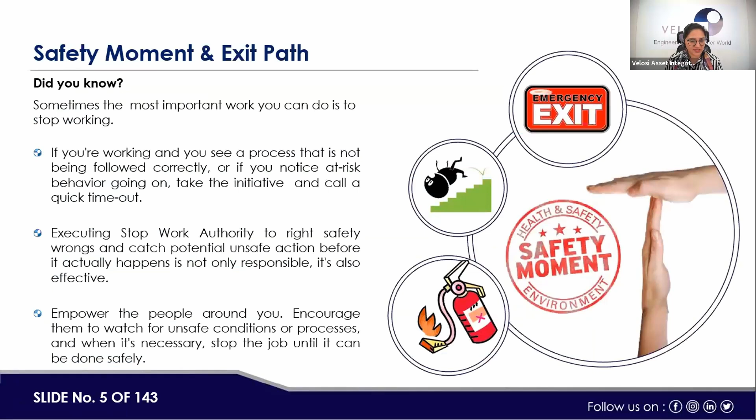So first of all, we will go through safety moments before we begin. Although most of us are in the comfort zone of our homes, we should be aware of emergency exits. We should keep a safe distance and generally take care of ourselves and those who are around us.

So let me begin with the Velosi introduction. I will just give a brief introduction of Velosi, what we do, and where we are based in. Velosi is a leading global consultancy firm that provides asset integrity management, HSE, engineering, environmental, and software solutions to clients in oil and gas, energy, power, and petrochemical industries around the world.

We have our in-house proprietary software, VAIL-Plant, as well, which is developed by us. It is an industry-leading SAP-certified complete asset integrity solution that is currently being used by oil and gas giants such as ADNOC, Dragon Oil, SunUp, and many more.

So we provide services in a broad range of industries, including but not limited to oil refineries, GOSPs, gas and NGL plants, fertilizer plants, structures, offshore platforms, wellheads, pipelines, and many more.

Giving you a brief touch of our services, I will just cover the main topics that include asset integrity management services, under which we provide RBI, pipeline integrity management system, structure integrity management system, pressurized equipment management system, safety integrity level, condition assessment studies, asset life extension studies, corrosion management plan, DCVG, and CIP service.

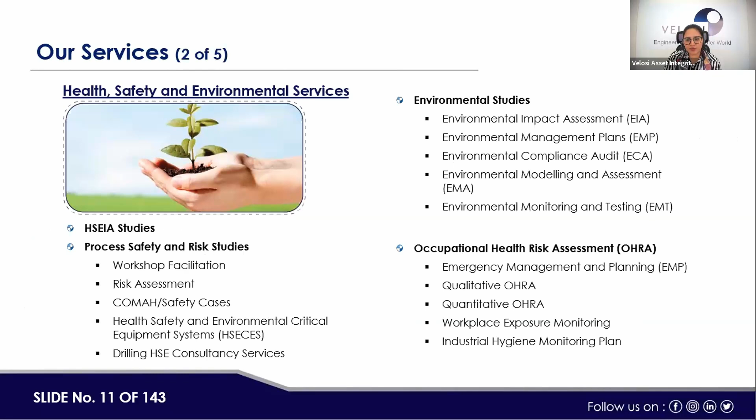Then we have the umbrella of engineering services, under which we provide conceptual design feeds, operating manuals and procedures, design verification and appraisals, FFS. And as discussed, we also provide software solutions.

We have developed our in-house softwares, including VAIL-Plant, which is an asset integrity management system, VAIL-PHA, which is a process hazard analysis, then VAIL-PRA, which is petrol station risk assessment software, and then VAIL-MTS, which is material tracking system, VAIL-ERP, as the name suggests, enterprise resource planning, VAIL-CTR, VAIL-ORP, VAIL-Flow, and we are also working on many other softwares which are under development.

Then we also provide audit and assessment services covering OHSAS safety audits, technical audits, environmental audits, structural audits, PSMs, electrical audits, flammable storage facility audits, etc.

Velosi also provides ISO consultancy and training services to its clients, and we have so far covered ISO 9001 quality management system service, then ISO 14001, OHSAS 18001, which is occupational health and safety management system, and ISO 45001 occupational health and safety management system. Then we have also provided this ISO consultancy and training services in ISO 50001 and ISO 55001, which is asset management system.

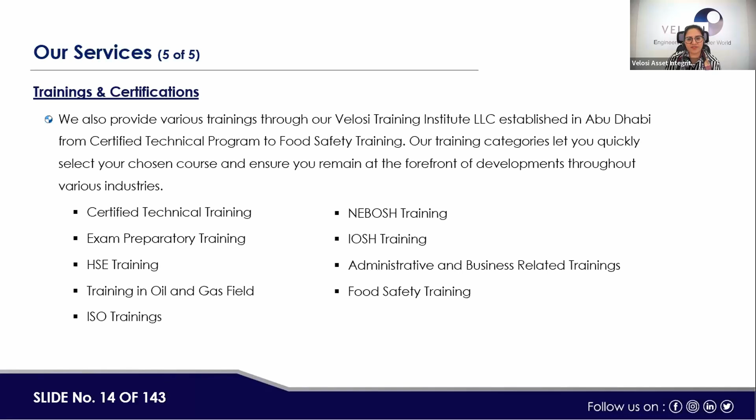We also provide various trainings through our Velosi Training Institute LLC, established in Abu Dhabi, from certified technical programs to food safety training. Our training categories let you quickly select your chosen course and ensure you remain at the forefront of development throughout various industries. So far, we have provided certified technical training, exam preparatory training, HSE training, food safety, IOSH training, NEBOSH training, admin and business related trainings, etc.

The VAIL ERP, Enterprise Resource Planning Software, supports storage of assets data and associated management-related activities and documents in one central location. Under ERP there are multiple modules covering accounts, HRMS, payroll, CTR, which is cost, time, and resource management system, then sales and purchase, CRM, which is customer relationship management, assets, material tracking system, project management, and others.

Our third software is VAIL CMMS, computerized maintenance management system. It is a powerful tool that keeps track of information about an organization's maintenance operations, and it helps management make informed decisions by planning, scheduling, executing, and optimizing maintenance operations, resources, and materials. This is the dashboard of VAIL CMMS, under which you can see work orders, notifications, maintenance plans, and multiple other capabilities.

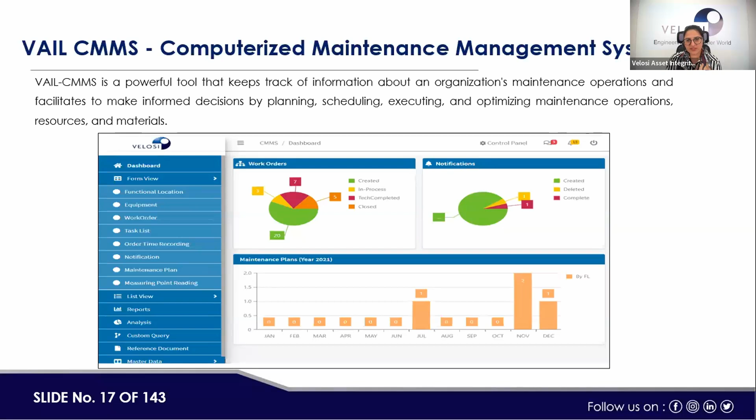VAIL PHA, process hazard analysis software, under which we have SIL and HAZOP.

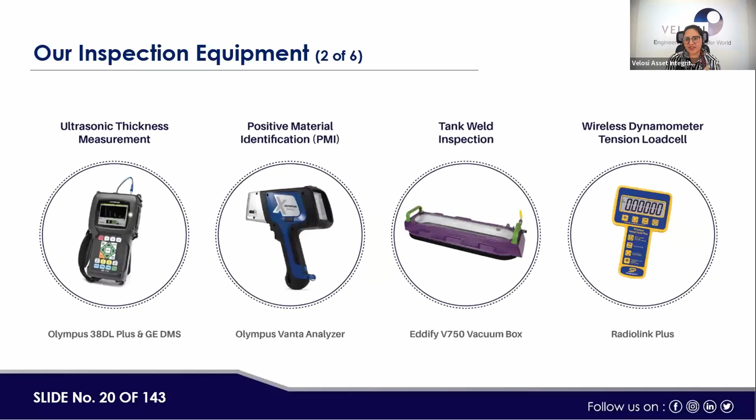During the engineering services, we use multiple inspection equipment. These are some of the equipment we'll quickly go through: magnetic flux leakage, coating thickness measurement, ultrasonic pulse velocity, positive material identification, tank weld inspection, wireless dynamometer, tension load cells, ultraviolet imaging, eddy current testing, resistance testing, holiday detectors, ultrasonic flaw detectors, PAUT, TOFD, advanced UTs, RT projectors. These are the equipment we use during our inspection in engineering services.

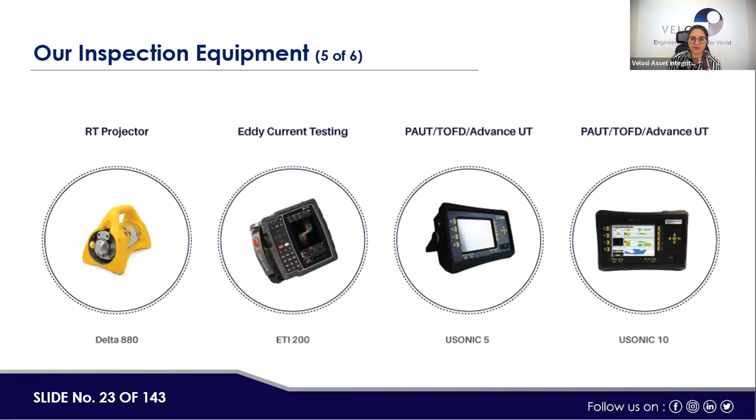The subject is interesting, and it is very relevant to our day-to-day integrity issues, what we face or used to face in running plants. This is a technical webinar, technical knowledge. So it cannot be sweet like a movie, drama, poetry or fiction. It is a science, and we have to go by the code of practice and how it goes.

So what is a dead leg? Basically, it should be called piping dead leg. When we say piping dead leg, we mean the area where there could be no flow, low flow, sometimes, but basically should be no flow, and dead end of the piping systems.

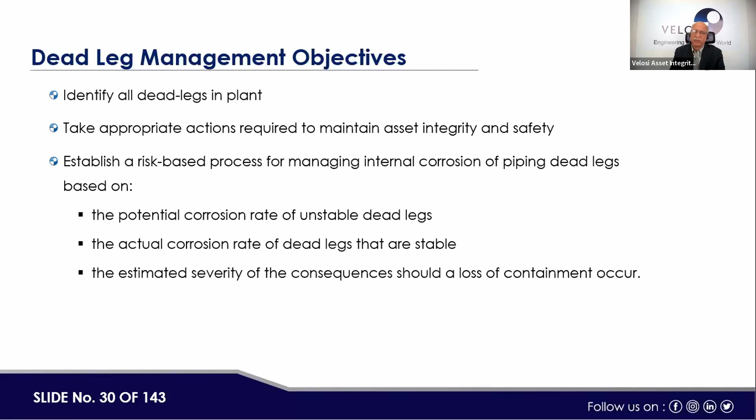So why is a dead leg a concern? If a dead leg fails, it can cause leakage and rupture, and if the fluid is flammable, it may find an ignition source. In that scenario, there could be a fire or explosion. We know there are certain damage mechanisms which are more aggressive in a stagnant situation of any piping system, so we need to take care of that, and there are major integrity threats we need to keep in mind.

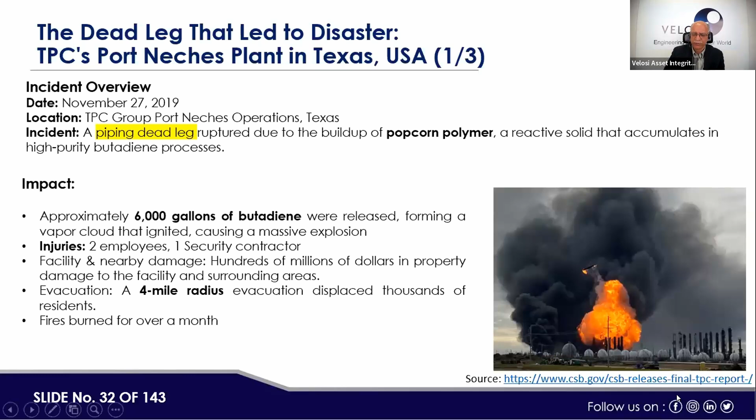Here is an addition compared to the previous case. In 2019, at TPC Group's Port Neches Operation in Texas, a piping dead leg rupture occurred due to buildup of popcorn polymer, a reactive solid that accumulates in the high purity butadiene process. Approximately 6,000 gallons of butadiene were released, forming a vapor cloud that ignited, causing a massive explosion. There were two injuries, one security contractor was also affected, and this fire continued for about a month, affecting evacuation up to 4 miles, about 7 kilometers, around the facility. You can see this photo, and we have taken this video from a web page, which is also referenced here, respecting the copyright.

Identified causes were dead leg management failure, inadequate process hazard analysis - they could not foresee it could go wrong - lack of emergency isolation valves, and poor internal policies to control popcorn polymer. What was the lesson learned? The regular identification and management of dead legs in high risk areas, timely implementation of suggested safety actions from hazard analysis, installation of emergency isolation valves to minimize release duration, and enhanced internal policies for controlling hazards like popcorn polymers.

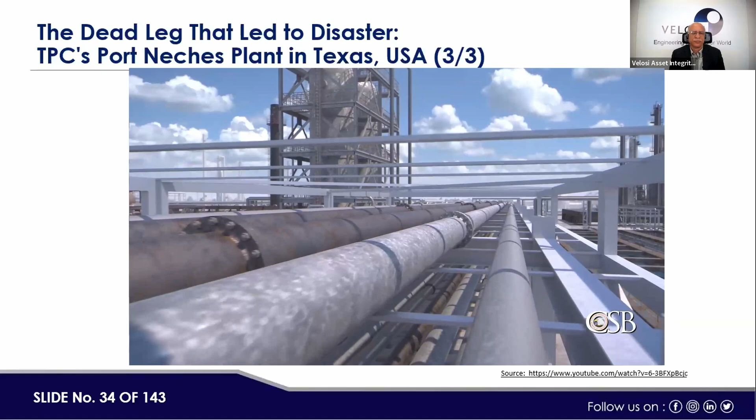So if we try to see this video, let's see. November 27th, 2019, the TPC Group chemical plant in Port Neches, Texas. Release of highly flammable butadiene caused a series of explosions that could be felt up to 30 miles away. The blast also destroyed portions of the TPC facility, damaged nearby homes and businesses, and prompted a mandatory evacuation of residents living within 4 miles of the plant. Several workers and members of the public reported injuries, and fires burned at the facility for over a month. At the time of the incident, the company produced butadiene at its Port Neches plant. Butadiene is used as a building block in the production of a wide range of products, but it's most commonly used to produce synthetic rubber. It is a highly reactive chemical, which if not properly managed, can lead to serious hazards. On August 4th, 2019, a worker performed a routine operation in TPC's butadiene unit.

As part of that operation, the worker shut down a primary pump that was part of the butadiene production process. When the worker tried to restart the pump, it would not operate. The primary pump was sent for repair and remained out of service from that date forward. A spare pump was used to continue operations.

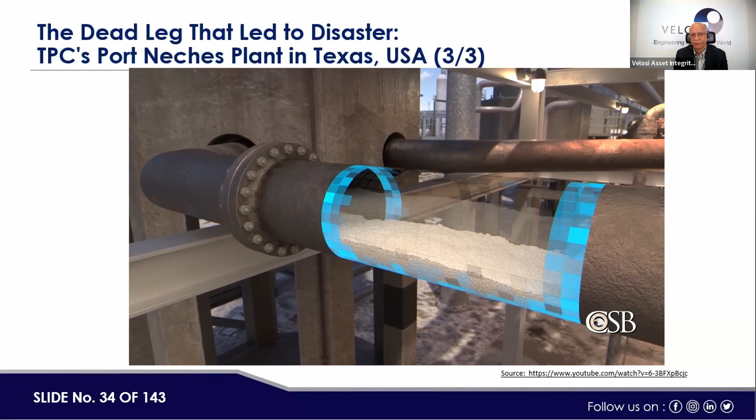The inoperable pump created a significant dead leg, which is an area of piping that is open to the process but does not have any material flowing through it. The CSB determined that over the next 114 days, popcorn polymer began to form and accumulate within the dead leg. But the CSB could not find evidence that anyone at TPC recognized the hazard created by the dead leg.

At 12:54 a.m. on November 27th, excessive popcorn polymer buildup caused the dead leg piping to suddenly rupture. Approximately 6,000 gallons of liquid, primarily composed of butadiene, emptied through the ruptured piping in less than a minute. The liquid vaporized upon release to the atmosphere, forming a flammable cloud.

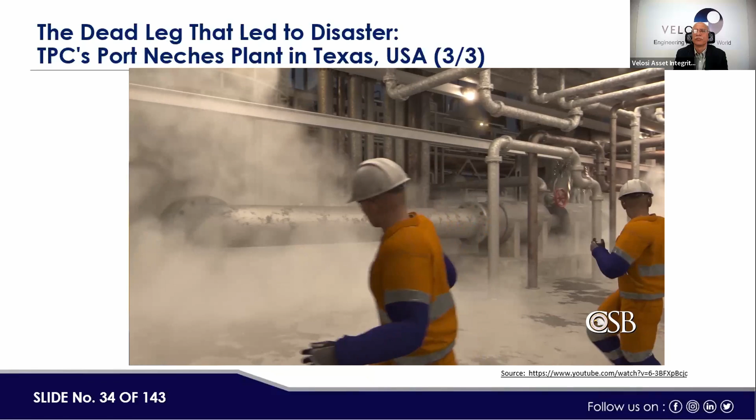Three nearby workers were startled by the rupture. They immediately recognized the danger and quickly departed as the vapor cloud grew. In just 2 minutes, the flammable vapor cloud found an ignition source and exploded.

The resulting pressure wave destroyed parts of the facility and injured 2 TPC employees and a security contractor. The blast damaged nearby homes and buildings and was reportedly felt up to 30 miles away. So this is one incident.

There's also another incident which occurred in Oklahoma, a natural gas pipeline explosion. It was January 30th this year. Location: rural Beaver County, Oklahoma, near the Texas border again. The failure in an 8-inch feeder pipe, a dead leg, caused a fire and rupture in a main gas pipeline, resulting in a fireball visible over 80 miles away. You can see the photo on the right.

The pipeline involved was likely an unregulated gas gathering line with no enforced federal safety regulation in America. So the key takeaway is mandatory isolation of the dead leg pipes, enhanced corrosion monitoring, and regulation of the gas gathering lines.

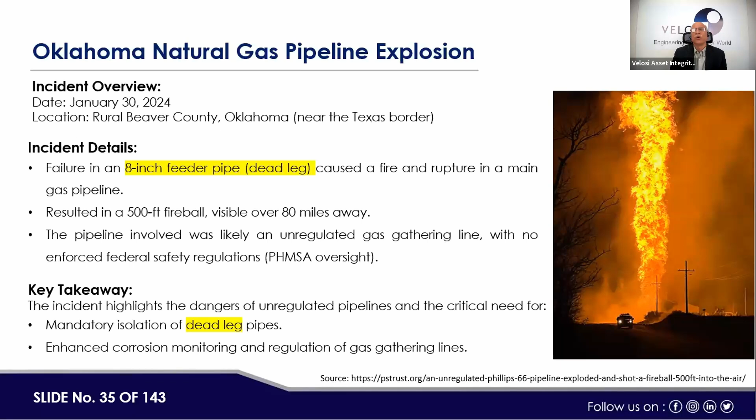So with these 2 incidents, what we're trying to prove is that dead legs are an important part of the facility and we need to pay special attention. Also, as per API 580, 581, and other statistical data from reliability books, the failure rate of small bore piping or dead legs is highest.

So to manage dead legs, we try to follow 4 steps. First of all, identification of the dead legs on the P&IDs, isometric drawings, and also making them known in accordance with the guideline of API 570 and 574.

The second part is creating a dead leg register, a hierarchy or listing of all the dead legs. The listing is done by making parent-child relationships and identifying the type of dead legs, tagging and serials, operating data, materials of construction data, corrosion and fluid data, and inspection records, which could be correlated with those dead legs as inspection is carried out.

Once you have a dead leg register, then we can do risk ranking or criticality rating assessment by identifying probability of failure and consequence of failure. Once risk is identified, then we can do the inspection planning as well.

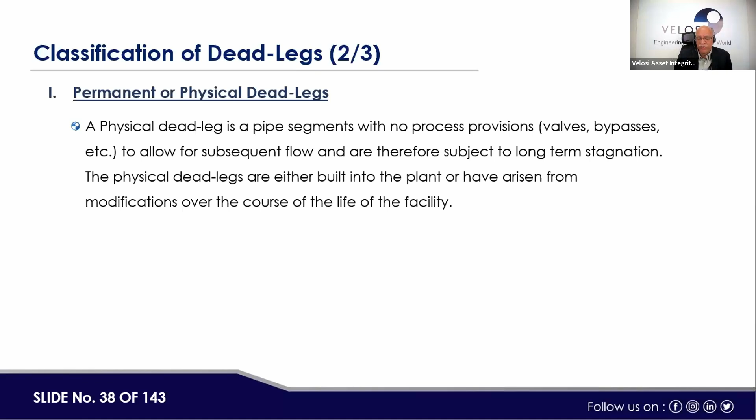So we need to identify which dead legs are permanent and which are of a physical nature. Then there's the operational dead leg, as in the example given earlier - the bypass of control valves. Two control valves that should be alternatively used, or two pumps that should be alternatively used - those are operational dead legs, the piping system associated with those particular equipment.

Mothball dead legs, as I explained earlier, are the portion of the facility which is basically put on hold for a certain period, months or years, due to non-operational reasons. If it's brought back to operation, it has to be handled properly and its condition should be assessed properly. Mothballing should be done with due procedure, so that internal and external corrosion can be prevented during the mothballed duration of that portion of the piping system or facility.

The risk assessment or criticality ranking is as per API 580, 581. The methodology for the risk and criticality ranking is the same as we apply in any area PHA process - what are the probability of failure, what are the damage mechanisms, failure modes, internal, external, or escalation factors, absence of any corrosion inhibition or applicable flushing criteria, and so on.

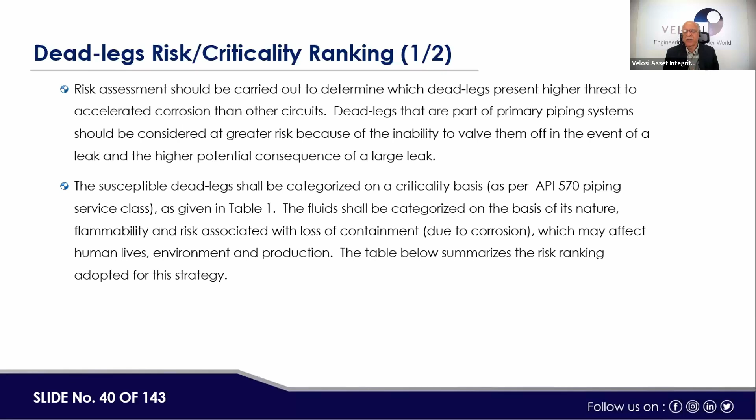That will help us calculate the probability of failure, and then the consequence of failure, as we estimate from a production point of view, safety point of view, environmental point of view, and health point of view. All these aspects are calculated based on the volume and nature of the fluid contained in that particular portion of the inventory group or isolatable section, which is part and parcel of the dead leg. If the dead leg ruptures or leaks, the whole fluid which will come out has to be considered and accounted for. So the multiplication of the PoF and CoF will give you the risk or criticality, and that criticality rating can be used for the subsequent decision-making process.

So in a normal risk matrix, there are four categories of risk matrix or criticality ranking: high, medium, low, or negligible. This scale varies from company to company, but normally, if the fatality and severity or probability-wise factors are positioned in the risk matrix, that gives high, then medium, low, and negligible - we can see in the next slide. When we look at the risk matrix, I will explain it further.

If we cannot reduce the high criticality or high risk of the dead leg, then we may have to think about redesigning the plant, or modifying the plant so that dead leg could be removed.

For example, small bore connections - if we cannot control the effect of corrosion, then it's better to remove and flush it off. Similarly, for standby pumps, we have to make sure the pumps are running, or make a plan so the pump both should be in operation at some certain interval.

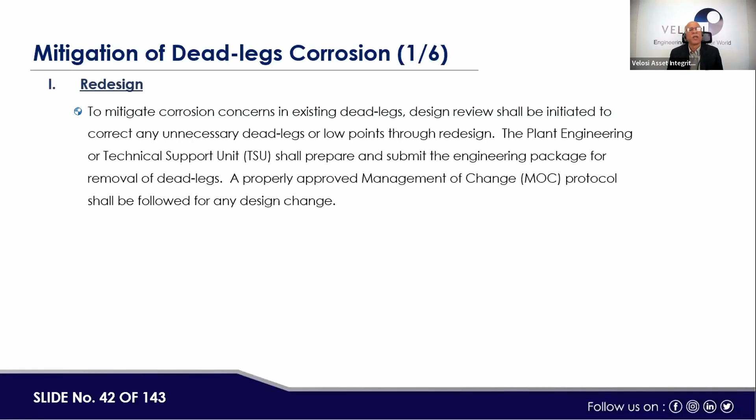So redesign means if we cannot remove that particular dead leg, we should redesign the system if possible. Second one, flushing is applicable on the bypasses of control valves, flushing of dead legs, or the vessels or tanks, because there could be dirt accumulation.

Similarly, upstream or downstream portion of the PSVs could be accumulating in low flow areas. The flushing is done with a flow rate of 1.5 to 2.5 meters per second, so the dead fluid or dirt could be removed from that part.

For class 1, in general, 1/4 of the remaining life or 36 months - whatever is lesser, should be used for flushing, up to 3 years.

Class 2 is 1/2 of the remaining life. Class 1, class 2, class 3, class 4 are the API 570 classes - since I'm not covering that part, this class has to be referred from API 570. Then class 3 and class 4, basically 36 months is the interval for flushing.

Then chemical treatment - we may have to inject a biocide so bacterial growth could be flushed out, or there could be inhibitors. Inhibitors are either water soluble or condensated oil soluble.

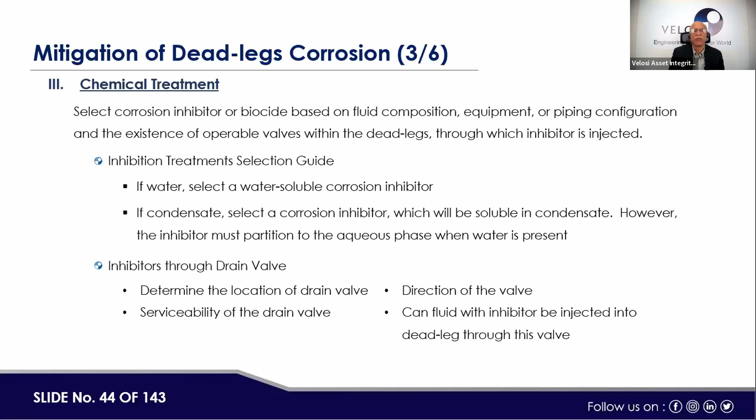While selecting inhibitor injection, we have to determine the location of the drain valve, serviceability of the drain valve, direction of the valve, and whether fluid with inhibitor can be injected into the dead leg through this valve, and then we go for that particular injection process.

Then assessment of the dead leg - this is a condition assessment of the dead legs. For example, externally it may look nicely painted, everything looks nice, but there could be high corrosion inside. So we have to check the internal condition of the dead leg as well by applying appropriate NDT technique.

A simple one is, if big diameter pipes are there, we can do normal UT gauging or UT scanning. If it's a small bore, we can use a micro probe, and if accurate micro probe is not available, then we may have to go for profile radiography - 3-inch and below or 2-inch and below, basically for dead legs or small bore connections.

So these two techniques are there. For bigger diameter, advanced NDT like PAUT or TOFD can also be used if needed for characterization of the metallography of that part.

However, the more conventional techniques - visual followed by profile RT or UT gauging or UT scanning - can give you a good idea about the health of the dead legs.

And if it is insulated, then insulation removal or thermography and those aspects - thermography will not help in this particular case, but we have to remove some portion of the insulation, and then condition assessment of that piping system has to be done.

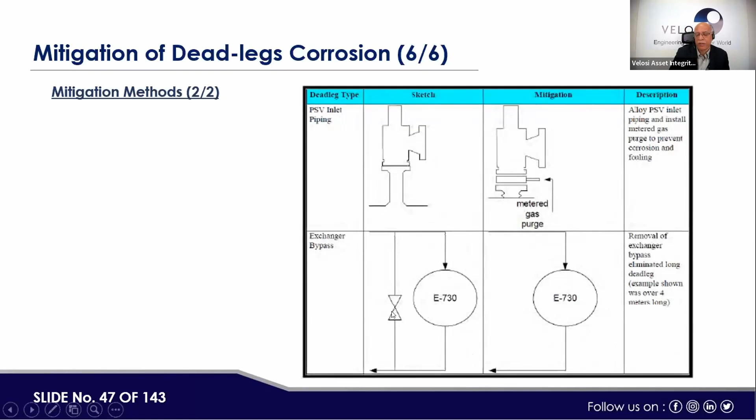Then when we select the CML, TML points - like how many points should be at that particular piping system - we have to take care what is the corrosion class, what is the expectation of the corrosion type, general or localized, expected damage mechanisms, criticality ranking of the piping, and whether there is a potential deposit of corrosion at the lower or upper portion of the piping system, if the pipe is insulated or not. Keeping all these factors in consideration, we try to select the TML, CML locations in accordance with the guideline of 574.

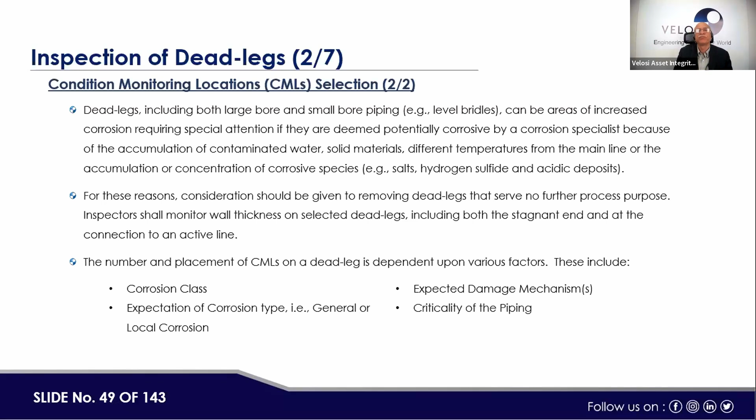Inspection strategy - for example, how a dead leg inspection strategy should be developed. What we are used to do, for example, if there are small bore connections like vents or drains on the piping systems, we can call profile radiography in one go, and do condition assessment of those piping systems as one campaign.

Similarly, mostly piping inspection can be done externally if it is not insulated. If it is insulated, then the possibility of removal of insulation depends upon the operating temperature of that particular segment. If we cannot touch the pipe because it's too hot, then we have to inspect during shutdown, or we can inspect the piping system during normal operation as an online OSI program - on-stream inspection program.

So we have to keep in mind, for example, assign CML to dead legs depending upon the potential and extent of dead leg corrosion anticipated or previously experienced. Inspect dead legs as per interval prescribed by corrosion and operation engineers. For highly corrosive and toxic fluid circuits, monitor all the piping dead legs in a circuit where experience has shown that corrosive fluid, sediments, salts, and contaminated water collect in the dead leg.

Then inspect particularly at locations where water and deposits can collect, allowing corrosion and microbiological activity, such as biological corrosion or SRB corrosion, to act as a faster damage mechanism - the bottom third of any horizontal piping, branch connections originating from the lower half of the horizontal lines.

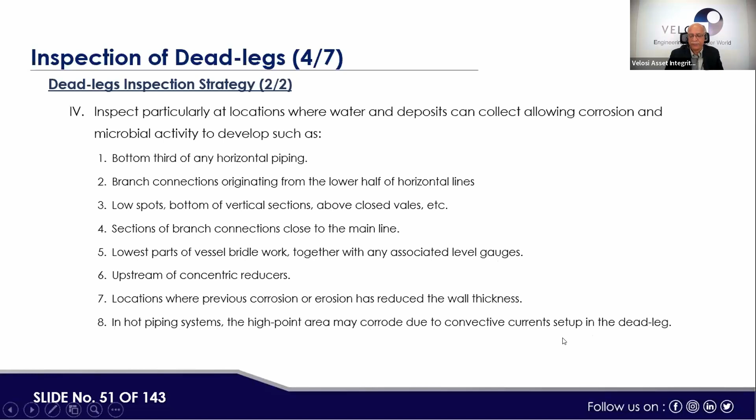What techniques can we use? A simple one is UT gauging or UT scanning, which can be applied on any bigger pipe diameter wherever access is possible. We can also use profile radiography for small bore connections up to 3 inch, which is more effective. For accessible small bore piping, for example 1 to 6 inch, class 0 and class 1 dead legs shall be RT - where RT is preferred and somewhere UT is preferred, but up to small bore, profile RT is more useful in my experience. Where radiation-sensitive electronic devices would be affected, or for sizes above 6 inch, UT scanning is acceptable in lieu of RT.

Inspection of the horizontal dead leg that may not be liquid full should have examination points in all 4 quadrants of any CML.

Infrared thermography may be useful for locating liquid interfaces in the dead leg. Inspection should include profile radiography on small diameter dead legs such as vent and drains, and scanning UT or RT on larger diameter dead legs. Other examination techniques for dead legs include EMAT and PEC as well.

All inspection findings shall be evaluated as appropriate, with defect notifications issued as necessary to document deficiencies resulting from dead leg inspections. For inspection findings in which corrosion is suspected, consultation with the corrosion, metallurgical engineering, and operating team should also be done so that this threat could be minimized.

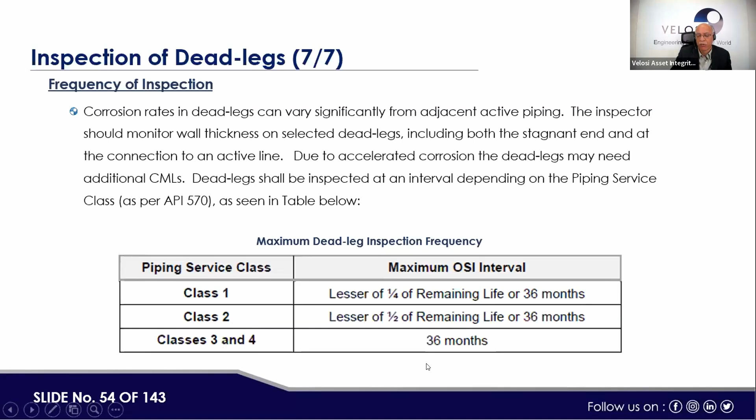What is the flushing velocity? It is 1.5 to 2.5 meters per second. So these flushing guidelines are available, and these guidelines can be used for flushing the dead legs where avoiding dead legs was not possible.

So now we went through the general dead legs - what dead legs are, how dead legs can be managed, how the criticality could be done. So whatever we are telling is based on standards and best practices.

The main standard and practice we used to follow, the main standard for piping dead legs, is API 570. API 570 has at least 6 parts plus appendices. First part is introduction. Second part is inspection, examination, and pressure testing practices, interval, frequency, and extent of inspection, inspection data evaluation, then analysis and recording, repair, alteration, and rerating of the piping system. Section 6 is inspection of buried piping.

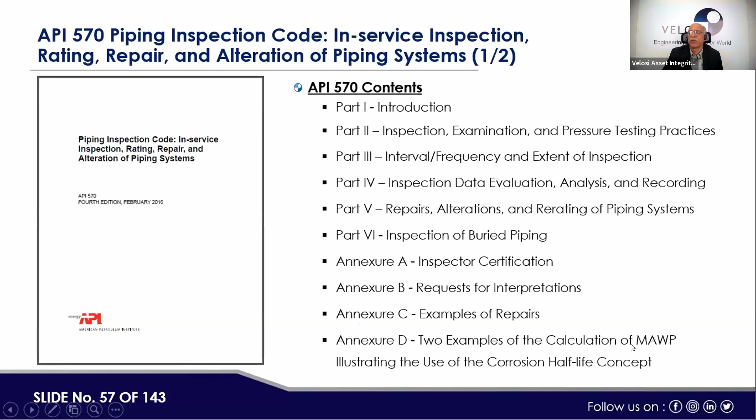Then in Annex A, inspector certification and request for interpretations. Annex C is example of repair. Annex D has 2 examples of the calculation of MAWP of the piping systems. So this is the index of API 570.

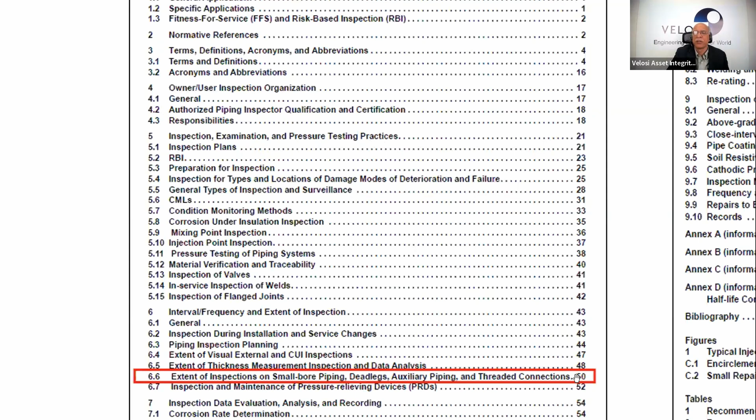If you wish to see more details, it's there the same way, starting from chapter 4, owner user inspection organization, then inspection, examination, and pressure testing practices. Under that, RBI is also part of this. Preparation for inspection is there. And item 6.6 is the extent of inspection on small bore piping, dead leg, auxiliary piping, and threaded connections, on page 50. So certain guidelines are given here.

The second standard which goes hand in hand with API 570 is API 571, which covers damage mechanisms affecting fixed equipment in the refining industry. So damage mechanism and process unit process flow diagram - there are 2 parts. Here is the index of this particular standard, but I cannot enlarge it.

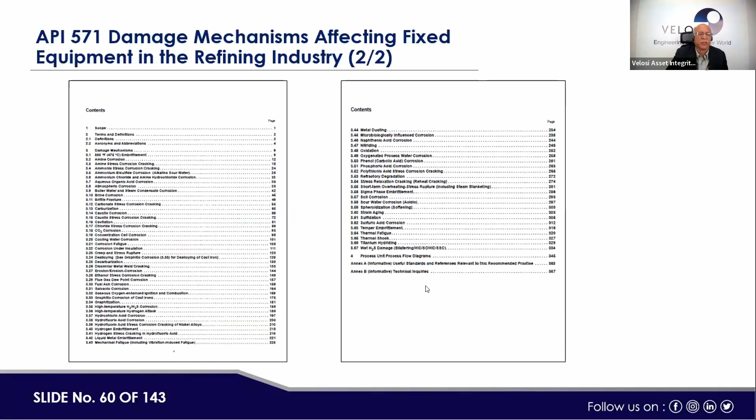So the next standard is API 574, and API 574 has about 10 parts. First one is introduction. Second part, piping components. Then piping joining methods. Reason for inspection. Inspection plans. Frequency and extent of inspection.

Safety precautions and preparatory work. Then inspection procedure and practices. Pressure test. Determination of minimum required thickness is also part of the standard, along with their appendices.

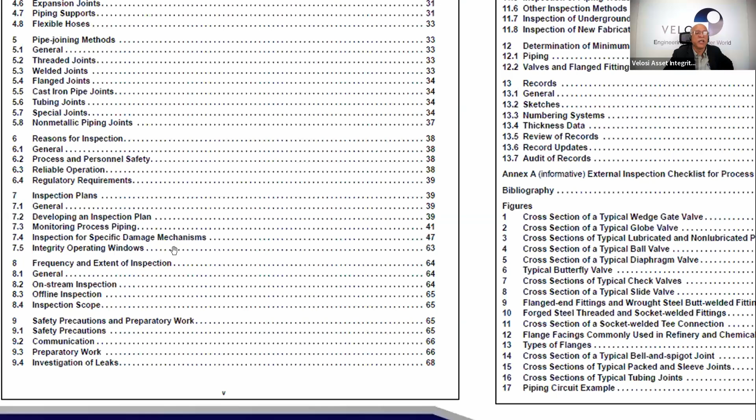And here, if we try to see the components covered in API 574 - let me make this bigger - piping components, then piping joining methods, then inspection plan, section 7, frequency and extent of inspection, and similarly there are other sections like pressure test, then section 12, determination of the minimum required thickness for various conditions.

Then API 580 is the RBI standard, and this standard has almost 12 sections.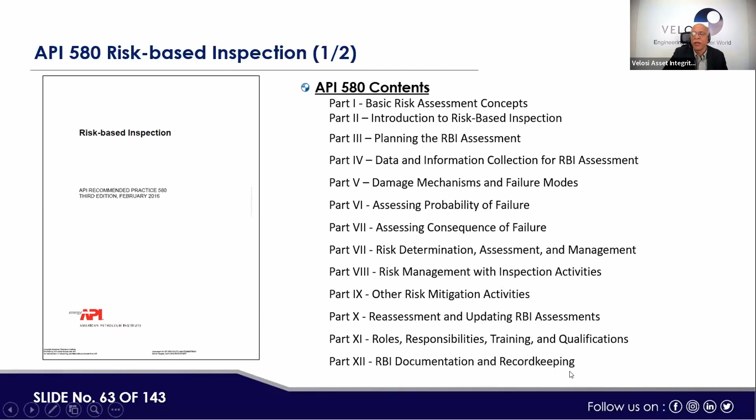So it also covers assessing consequence of failure, risk determination, assessment and management, risk management with inspection activities, other risk mitigation activities, reassessment and updating of RBI assessment, role responsibilities, training and qualifications, then RBI documentation and record keeping. This is basically the index of API 580.

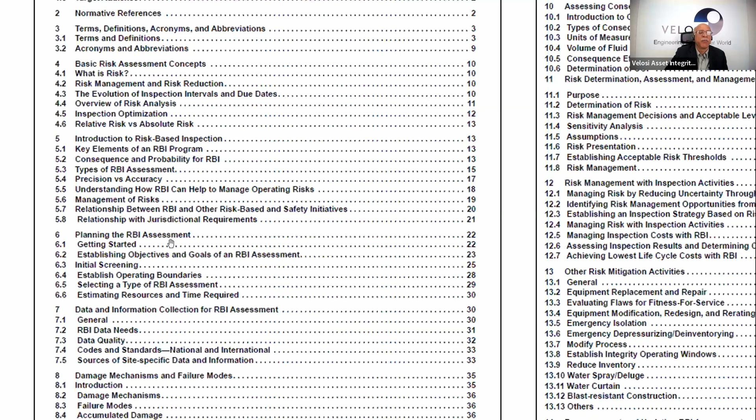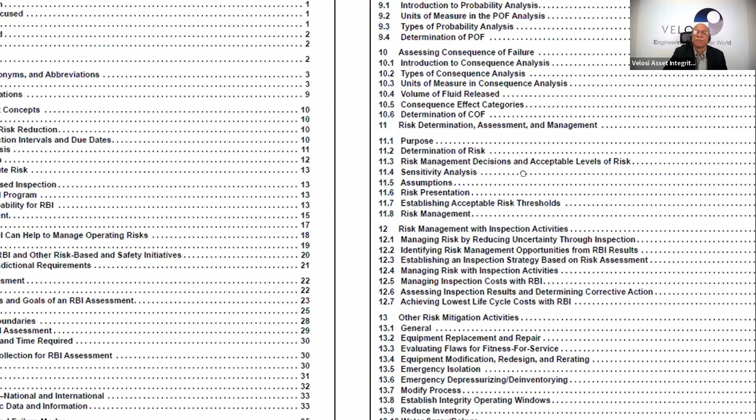As part of this, let's have a brief introduction: basic risk assessment concept, introduction to risk-based inspection, planning the RBI assessment, data and information collected for RBI assessment. Section 8 is damage mechanism and failure modes, which takes us to 571. Section 9 is assessing probability of failure, 10 is assessing consequence of failure, 11 is risk determination assessment and management, 12 is risk management, 13 is other risk mitigation activities, and 14 is reassessment and updating of RBI assessment, and so on.

It also has RBI documentation and recording. Sorry, there are basically 17 sections in this standard, not 12.

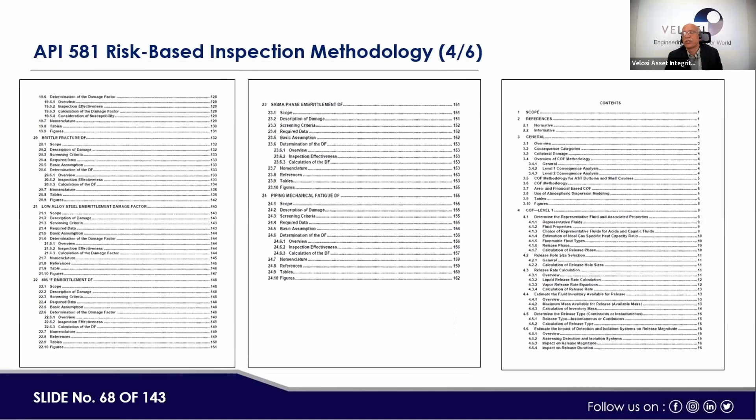The last standard in the row is API 581, which is a risk-based inspection methodology or guideline, and is a more detailed document. Part 1 is introduction, part 2 is probability of failure methodology in detail, part 3 is consequence of failure methodology in detail, part 4 is inspection planning and methodology in detail, and special equipment is also covered under part 5. The index is very big, so I will not go through each section. It's the same content but more detailed, and in terms of pages it's a big standard, going up to 162 pages.

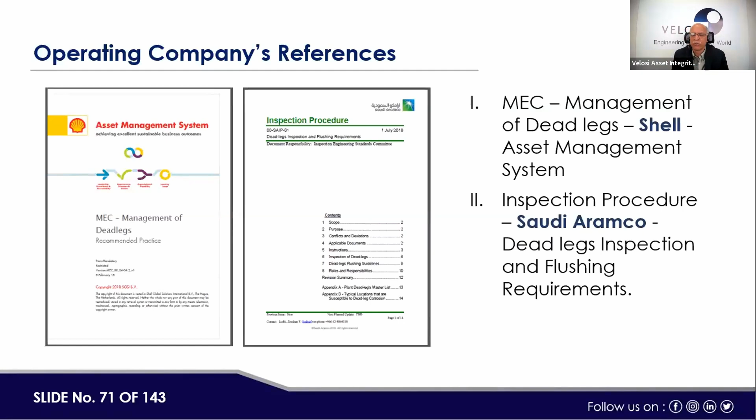This is a big standard, API 581. If you wish to go through it you can, but I'm not covering that part here. Other companies like Shell and Saudi Aramco have also made their own SOPs for the management of dead legs. I'm showing you these, the Shell SOP and the Saudi Aramco SOP. These SOPs are compatible with API 580, 581, 571, 570, and 574 standards, and references to them are given in these standards. So whatever we are trying to do is also being adopted or managed by the operating companies, and we are just assisting them to enhance this further.

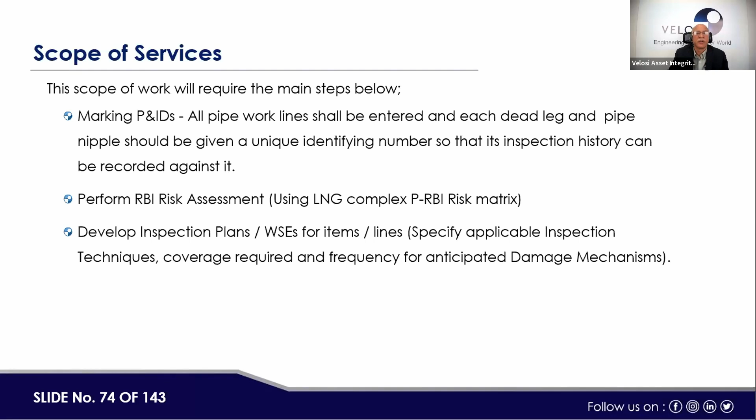We also specified applicable inspection techniques, coverage and frequency in accordance with the applicable damage mechanism and risk category. Deliverables included a high-level dead leg and small bore piping integrity management strategy document covering inspection strategy, techniques, intervals, and extent of inspection of dead legs and small bore piping; the methodology for deriving the inspection interval for dead legs and all small bore piping; assessment of CUI for insulated dead legs and small bore pipe work; and dead legs and small bore piping anomaly management.

Corrosion rate of dead legs and small bore piping nipples. The remaining life for dead legs and small bore piping nipples. The evaluation of dead legs and small bore piping nipples from the integrity point of view. Then define non-standard, non-compliant PMC connections, if any, and recommend repair methodology for each one. Detailed inspection program for dead legs and small bore piping and nipples, degradation mechanisms, methods, and intervals.

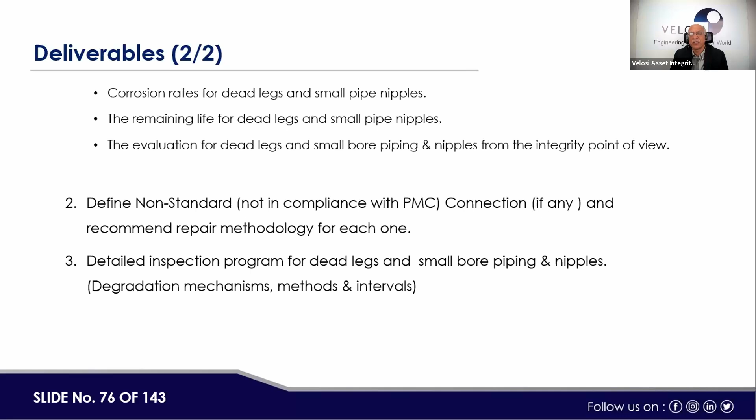These were basically the deliverables as per the agreement.

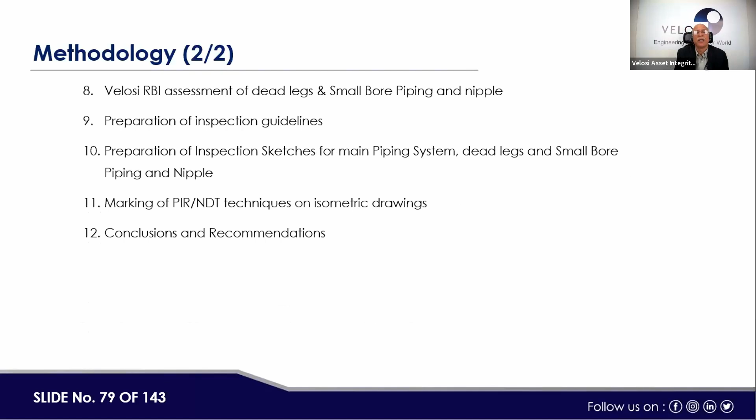So, Velosi RBI assessment of dead legs and small bore piping nipples, preparation of inspection guidelines, preparation of inspection sketches for main piping systems, dead legs and small bore piping and nipples. Then marking of PIR, NDT technique on isometric drawings, conclusions and recommendations.

Tagging and marking of the dead legs, like from and to, there's a piping system going on, if you see that. Then there could be DLIC1, DLIC2, DLIC3, DLIC4 - there could be 4 dead legs and their ID number is there. So tagging of dead leg is carried out on the basis of type of the dead leg and to and from the piping system. Small bore piping and nipples are further subdivided into SBP and nipple dead leg.

For example, DLIC, DLBB, DLLNC, DRN, etc. There is a nomenclature which will tell you what kind of dead leg this is. I will explain further. The numbering of dead leg starts from the point of origin toward the end point of the main line for each type of small bore piping.

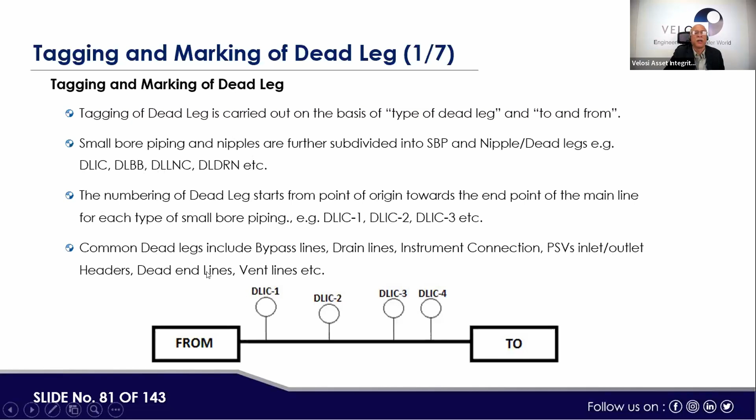For example, DLIC1, DLIC - if a similar type of dead leg is there, a different type, then it will be covering the type of that dead leg also. Then common dead legs include bypass lines, drain lines, instrument connections, PSVs, inlet, outlet, headers, then dead end lines, vent lines, etc.

So these are the abbreviations or types of dead legs we identified. For example, DLBB is blanked branches, DLBL is bleeders, DLBYP is bypass line. Then there is DLCP corrosion probe. Then there is DLCVBP, control valve bypass piping. Then there is drain, DRN drain. Then there is DLERL, cooler exchanger recirculation line.

Similarly, we identified all the dead leg types, and there is a serial number against each kind of dead leg. So the last ones are sample point DLSP, spare pump piping DLSPP, then DLSC - sample connection, there's a sample point. Then spare filter piping, DLSFP. Each company can develop their own, but these abbreviations were developed by Velosi for this particular client.

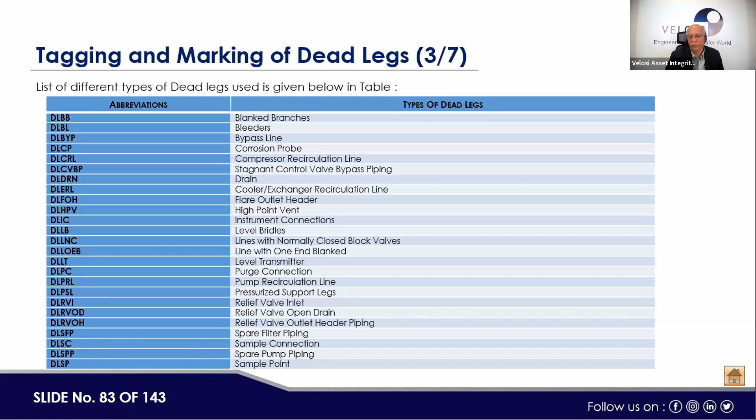So, one time we mark it on the P&ID. The P&ID is a non-directional drawing - it does not have a length, scale, or position. Then the same dead leg is marked on the isometric drawing, where we can see that this is a drain on a particular piping system, DLDRN drain.

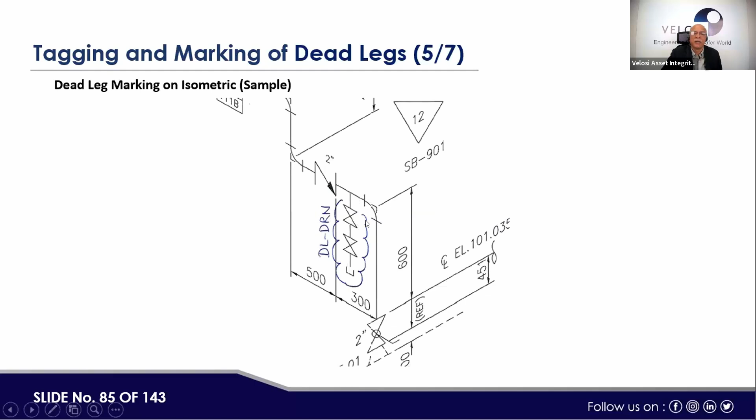Similarly, P&ID marking is a full P&ID marking, the first one done on a sample basis. Now it's full, and here you can see all types of dead legs marked on various sections of the pipeline P&ID. You can see the drainage system, this is a PSV's upstream downstream portion, and here small drains are there. So all types of dead legs, whether instrumentation small connections, vent points, drain points, or bypasses, are shown, and due attention has to be given to these.

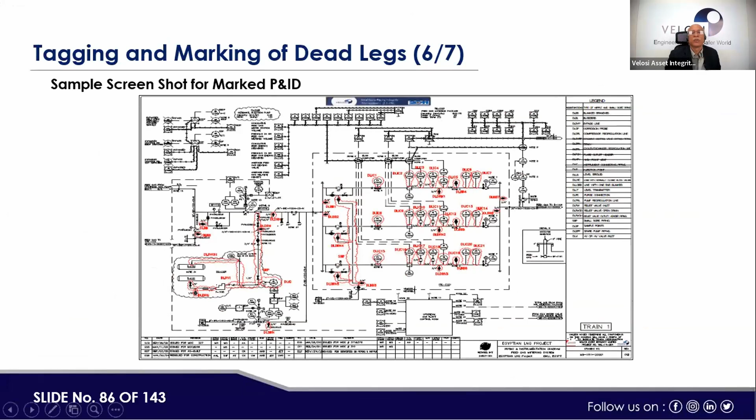Similarly, detailed marking on actual isometrics, you can see that this portion is shown as a drain isometric, and this is a dead leg.

I know there are a big number of people attending this webinar. So what we are showing is how the work is done. We cannot make you a master, but if you try to apply a similar approach, it will certainly help.

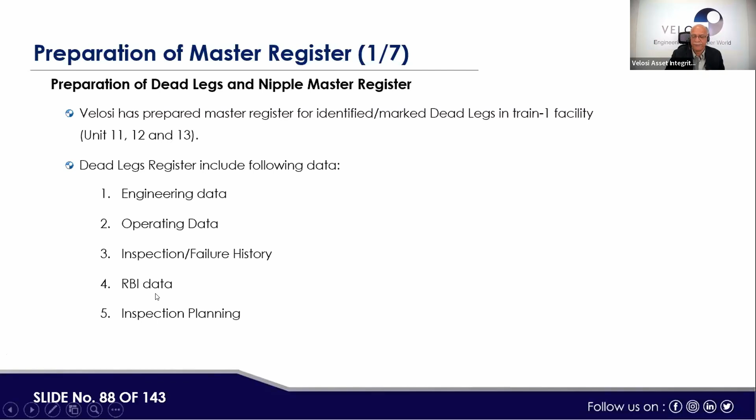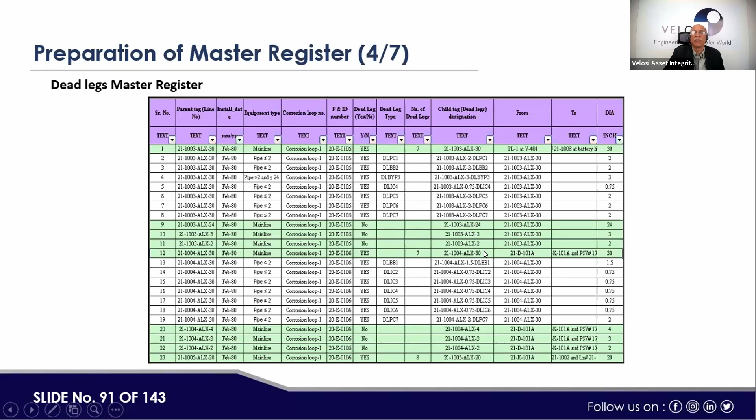Now if we try to see the asset register, the dead leg master register has serial number, parent tag number, installation date, equipment type, corrosion loop number, P&ID number, dead leg yes or no, and at the end the child tag, which is basically the dead leg. This dead leg register comes here, then from-to and the area. How we reach this, it is linked with the parent tag - this is a parent tag with one pipeline having so many dead legs. You can see 1, 2, 3, 4 on one pipeline, and if the line number changes, there will be certain changes in the list also.

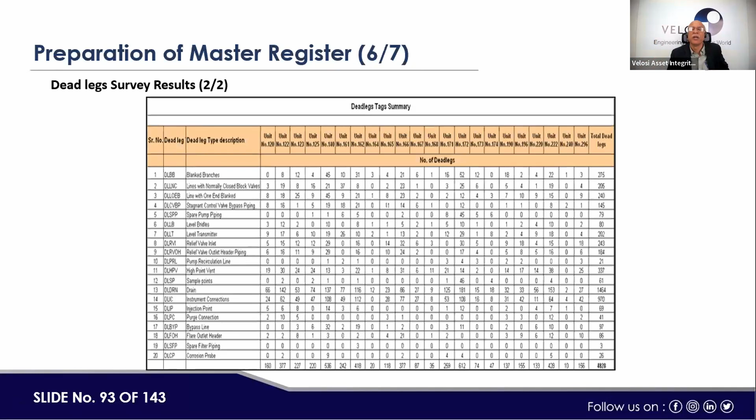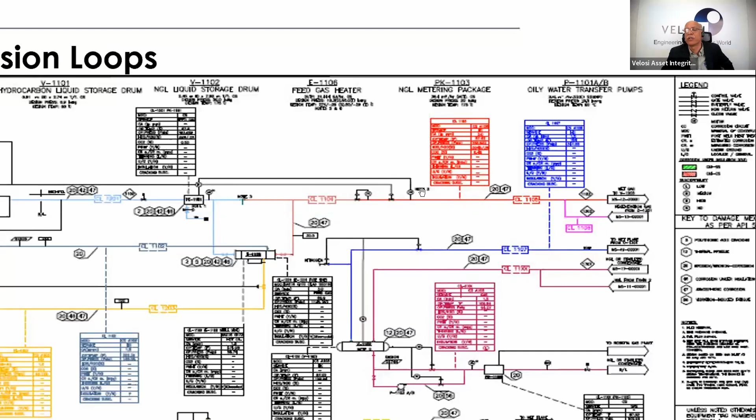So here, development of the corrosion loop - we prepare the corrosion loop for the same piping system, and the dead legs are also coming in. Here we try to identify all the damage mechanisms in accordance with API 571. These are the damage mechanisms applicable to which portion of the facility, like a normal RBI process, where we try to identify the applicable damage mechanisms.

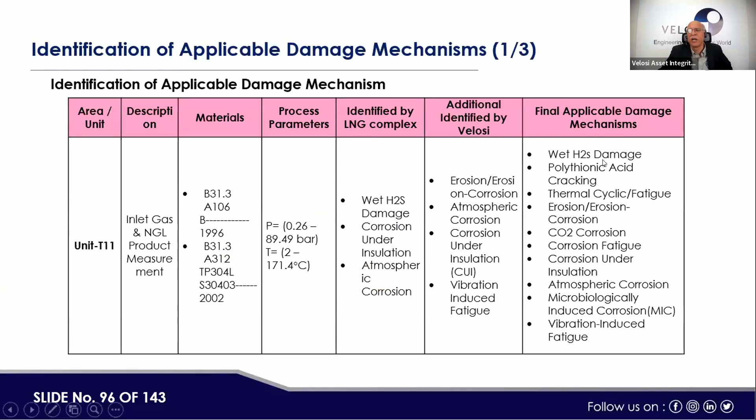This is a case study, an actual example I'm sharing with you by eliminating the name. Here, the damage mechanism already identified by the LNG complex, then additional ones we identified, then the final applicable damage mechanism on that particular unit T11, and similarly T12. This is a summary only, and each area's damage mechanisms are different, and it goes corrosion loop by corrosion loop. No inspection history record was available at that time, so we have done inspection later on.

Here, risk is calculated as probability of failure and consequence of failure in accordance with API 581. According to API 581 Part 2, Section 4, Table 4.1, the generic failure frequency value as a function of hole size is higher for small bore. This shows that the generic failure frequency, GFF, is higher for pipe 1, and hence we increase the PF value by 1 for nipple and dead leg.

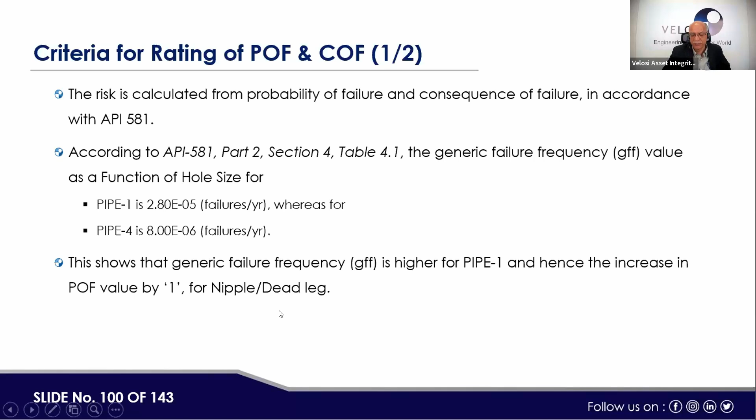One stage - here's how we do dead leg RBI for small bore connections, nipple, dead leg. Then risk ranking for the small bore: CF remains the same as piping since it is small bore piping, whereas for nipple dead leg, the risk ranking criteria of PF is increased by one level compared to piping, while CF remains the same as piping. Overall PF and CF and risk ranking is done.

Now, the risk PF and CF and this risk matrix which is used.

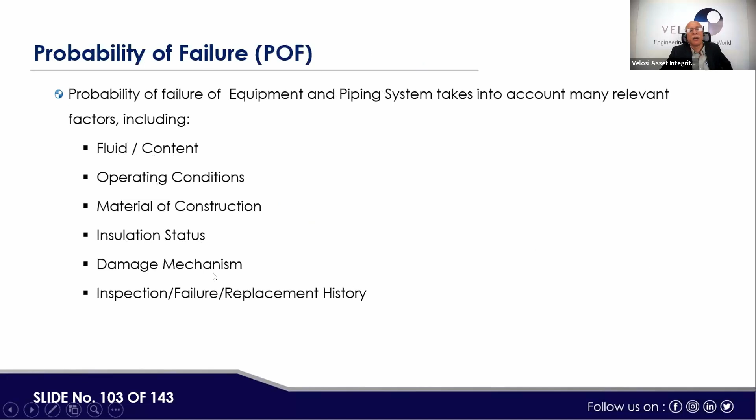Under probability, we have considered fluid content, operating conditions, material of construction, insulation status, damage mechanism, inspection, failure, and replacement history.

Identify consequence of failure: inside fluid, safety, environmental effect, business and capital effect, all are considered. On the COF side, classification is negligible, low, medium, high, and extreme.

Safety means from no injury to multiple fatalities, and capital loss goes from 0.1 million to 25 million, or greater than 25 million.

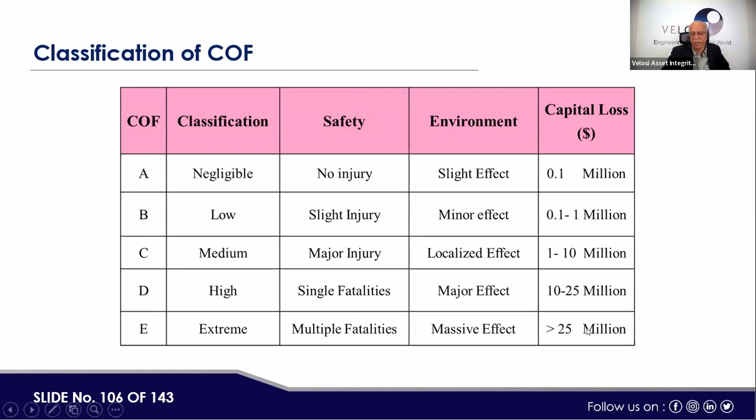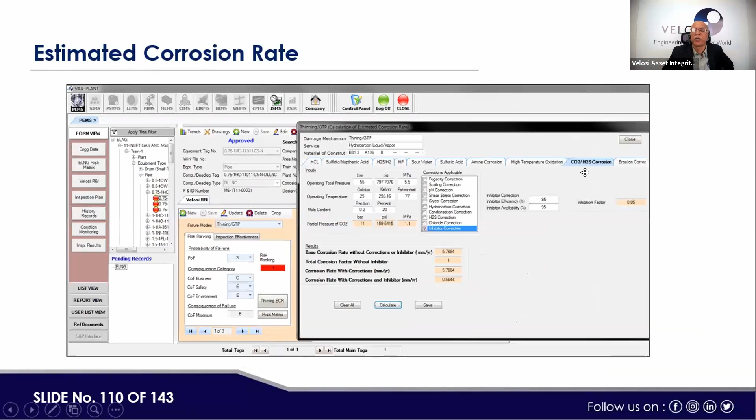Here we have done RBI assessment by assigning POF and COF for each equipment based on inspection effectiveness. This is an older screen. Now our new RBI program is more updated and more visible. Here the applicable damage mechanism is shown, as we can calculate the effect of the damage mechanism and their corrosion rates.

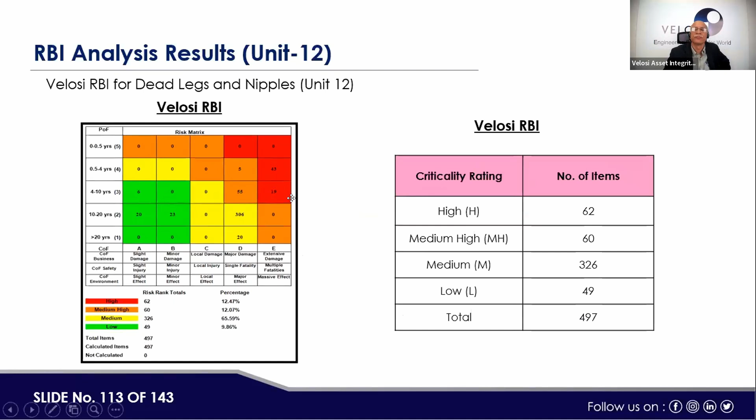This is the unit number 12 result.

So here is the summary of the philosophy of risk assessment and selection of inspection interval based on the LNG complex. Here we have the basis used for the selection of the interval.

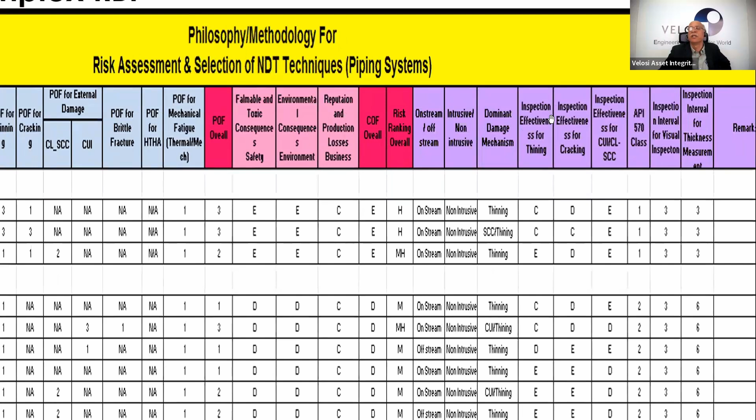If you see, the MOC, installation diameter, operating temperature, operating temperature in Fahrenheit, POF thinning, POF cracking, POF external, POF brittle, POF HTHA, POF mechanical fatigue, then POF overall, then consequence-wise, then on-stream inspection, on-stream, off-stream, or intrusive, non-intrusive, dominant damage mechanism, inspection effectiveness, then inspection effectiveness for SS, then API 570 class, then inspection interval, and this way inspection techniques are further selected.

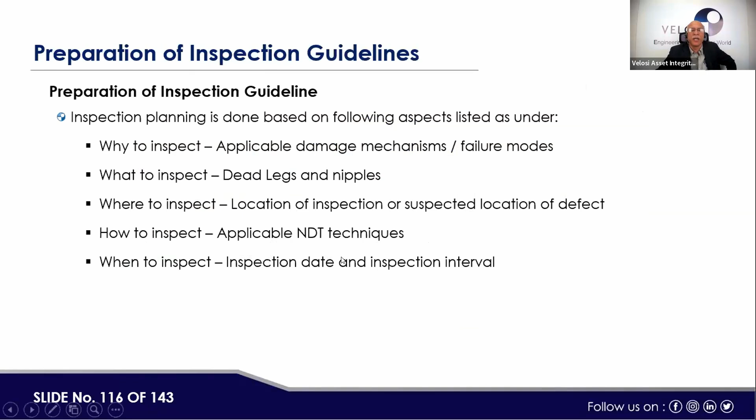Here we try to answer the 5 W's: why to inspect, what to inspect, where to inspect, how to inspect, and when to inspect for all dead legs. The applicable damage mechanisms are identified, what to inspect, dead leg and nipples register is prepared, location of inspection and the suspected location of defect are also identified on the isometric drawings, then applicable NDT techniques, inspection date, and inspection interval.

Then developing the inspection plan. The key element of data for development of an inspection plan is the likelihood factor. The key considerations are high total likelihood factors, high overall risk, the likelihood factor per damage type, then short or zero probabilistic remaining life.

So this is a Muslim country, and the call for prayer is ongoing in the background. Since our participants are from all religions, I'm just informing you that the sound you hear is the call for prayer from the Al Muslim Mosque in Abu Dhabi.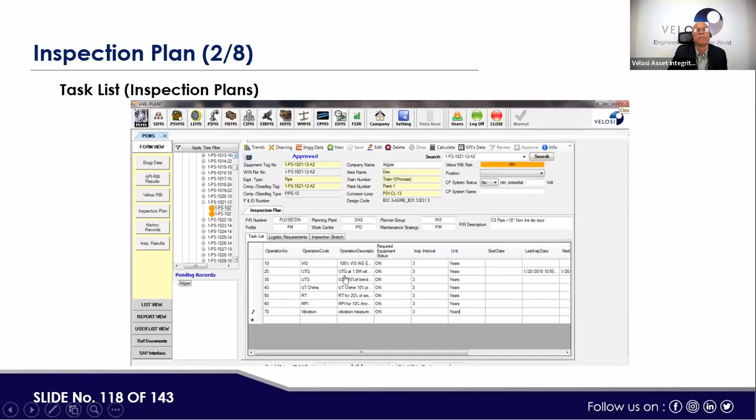Logistic requirements, like what kind of preparation we need for mechanical preparedness, HST caution, access and scaffolding requirement, are also identified for each piping tag. This is the hierarchy of the data.

Then the inspection plan, which is drawing-wise marked, and you can see the drawing here, which is attached, where whatever inspection techniques are required to be applied, that is marked on that particular drawing. Inspection sketches show where we need to go for inspection, technique-wise, what we need to cover. For example...

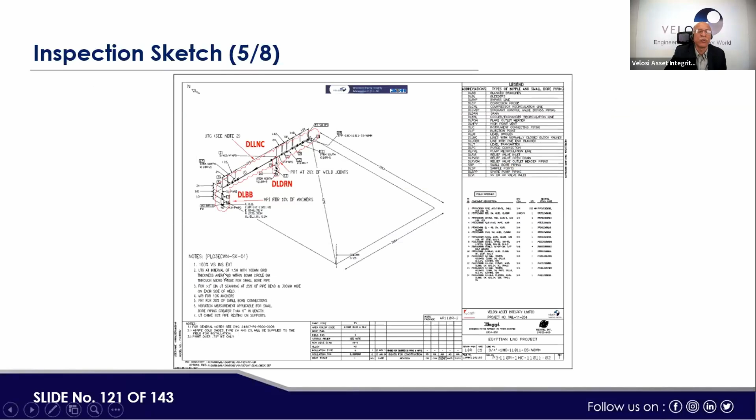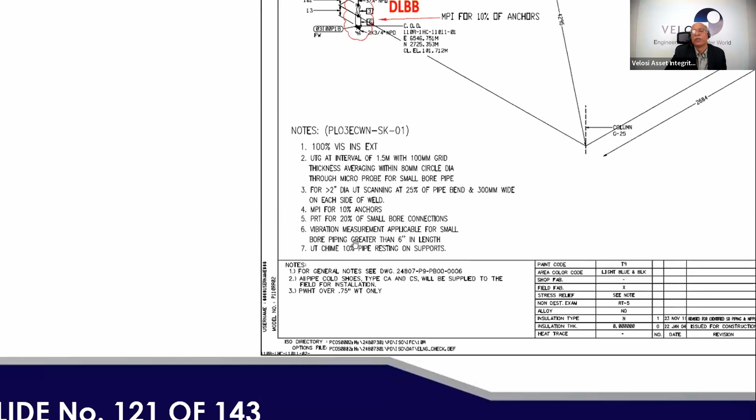100% visual inspection, UT gauging at interval of 1.5 meter with 100 mm grid thickness average. Then for greater than 2 inch diameter, UT scanning at 25% of piping bends. Then MPI for 10% of anchors, PRT for 20% of small bore connections, vibration measurement applicable for small bore piping greater than 6 inch length. Then UT chime for 10% of piping resting on supports. These techniques are identified to cover the complete piping system, including the dead legs.

Then these are sample inspection sketches for a bridle of a tank. Here all the level gauges, PSVs, and vessel components are shown where inspection is required to be done. The techniques are given to carry out the inspection as applicable, including external visual inspection, UT gauging, PRT, and other techniques.

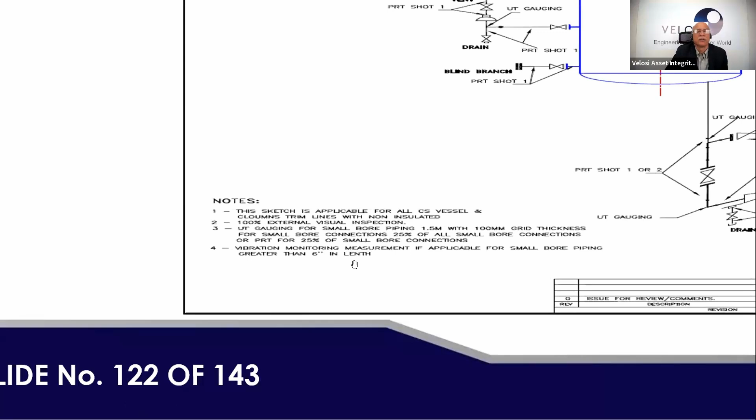So this is basically the inspection summary, the inspection guideline or passport report of that particular dead leg and piping system. This is how it is generated.

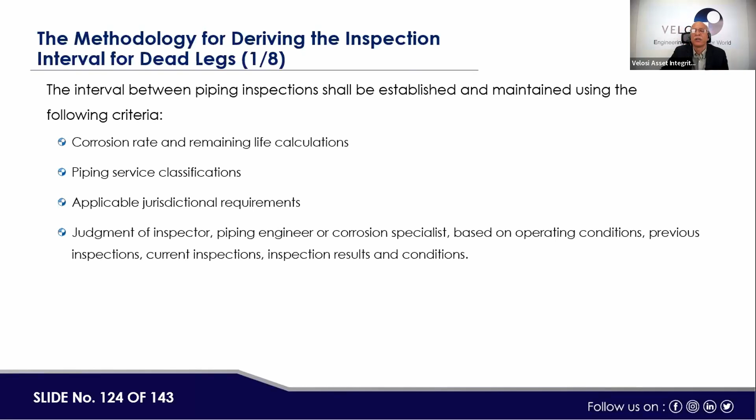Then the interval between piping inspections shall be established and maintained using the following criteria. Just informing you how it is done: corrosion rate and remaining life calculations, piping service classifications, applicable jurisdictional or regulatory requirements, then judgment of the inspector, piping engineer, corrosion specialist based on operating conditions, previous inspection results, current inspection results, and the actual condition of the piping system.

Then the selection of inspection technique, location, and inspection interval is prepared based on service, MOC, and type of equipment. For example, the main locations for NDT application for piping systems are selected around and at the bends, as probability of erosion and corrosion are relatively high at these locations. Location of NDT application is also selected for straight portions of the pipe at various points to assess the condition of the pipe, which might be affected by thinning, pitting, and other cracking damage mechanisms.

Then the following inspection techniques are preferred: visual inspection, profile radiography, UT gauging through microprobe for small bore, UT scanning, dye penetrant testing or DPT, and vibration monitoring and measurement for small bore.

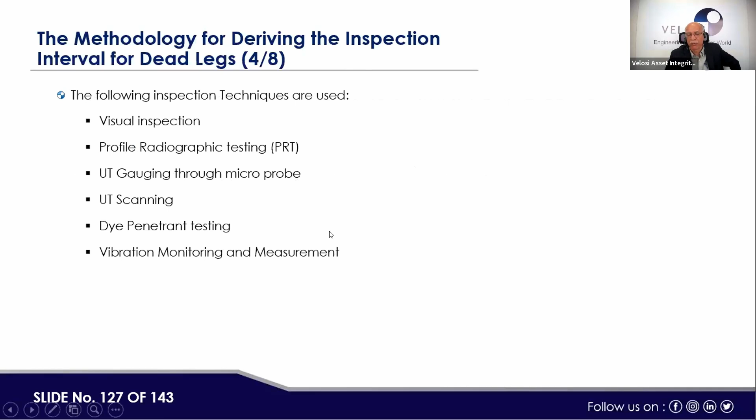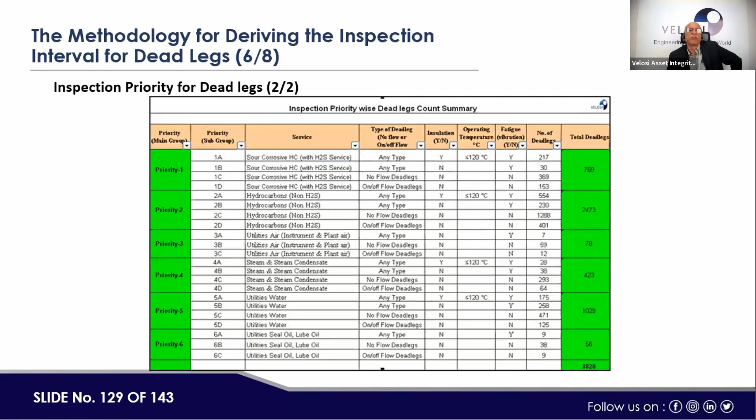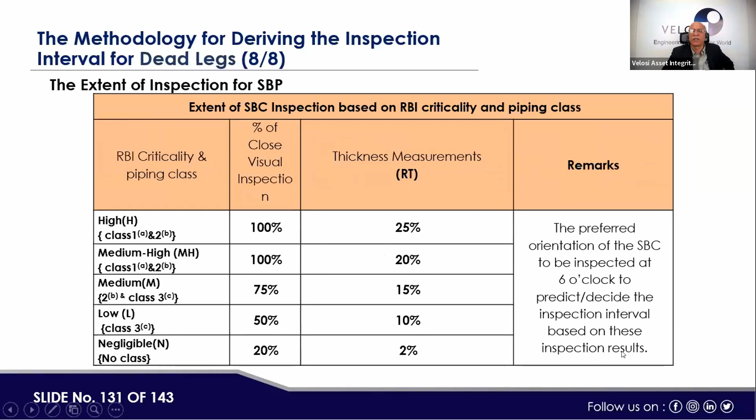Then, where we are using RT for small bore type, the preferred orientation of SBC to be inspected is at 6 o'clock, to predict and decide the inspection interval based on these inspection results. That was the aspect we have used.

So here, the list of dead legs for each unit. If we see unit 11, unit 12, unit 13, it's the same aspect which I showed earlier, a more visible condition. This slide has also been presented earlier. For other areas, dead legs, unit-wise we can show the various kinds of dead leg. Total are 28 types.

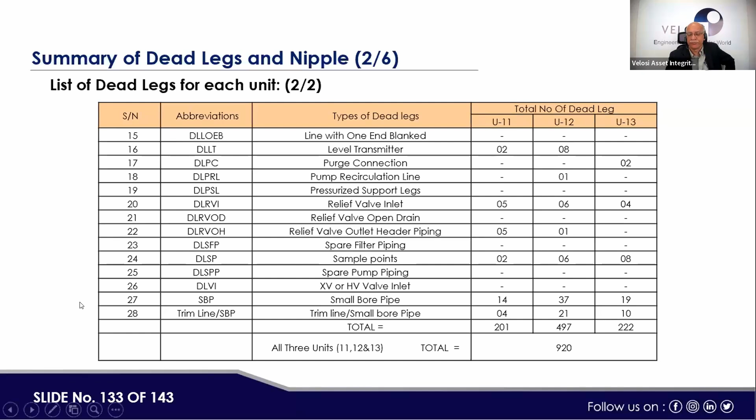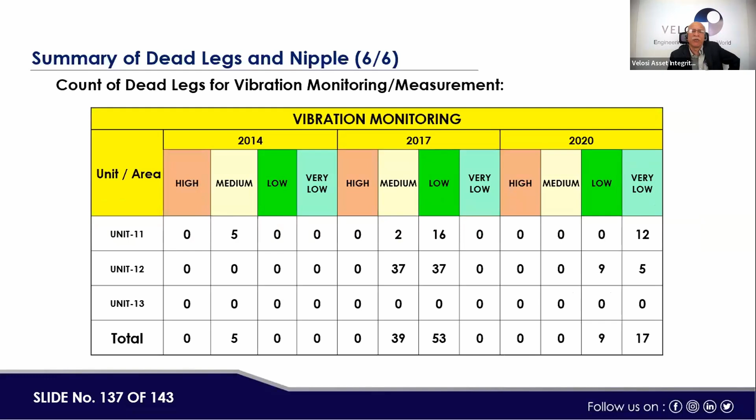This is 2014 results. Then there are certain vibration monitoring in 2014, 17, and 20. This is the plan which they were following at that time, because the study was done almost 12 years ago from today.

Then, based on Velosi experience and failure accident history, review of different oil and gas and petrochemical plant, more focus is recommended for critical dead leg, small bore piping system and nipples.

Corrosion under insulation can be best prevented by using appropriate paint, coating and maintaining the insulation or sealing vapor barriers to prevent moisture ingress. High quality coating properly applied can provide long-term protection. Moreover, low chloride insulation should be used on 300 series SS to minimize the potential for pitting and chloride SCC.

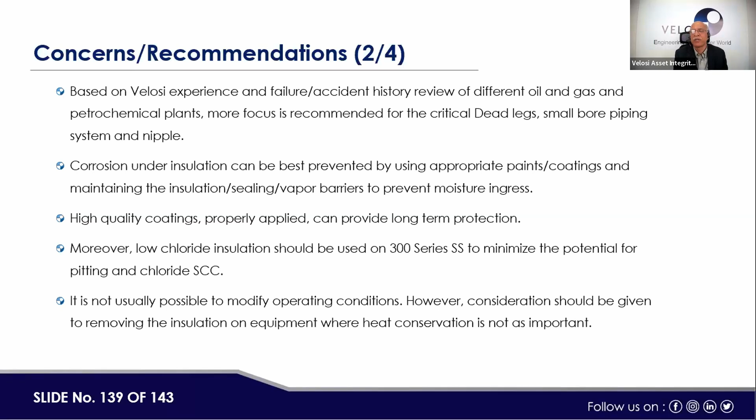It is not usually possible to modify operating conditions. However, consideration should be given to removing the insulation on equipment where heat conservation is not very important.

Corrosion inhibitors may be required to control amine corrosion within acceptable levels. Liquid metal embrittlement can only be prevented by protecting the metal substrate from coming into contact with low melting metal. Once cracking from LME has initiated, grinding out the affected area is not an acceptable fix.

Scale and debris accumulation should be removed and cleaned regularly to prevent under-deposit corrosion by flushing. A moderate to severely scaled system will begin experiencing corrosion as soon as a surface has been covered.

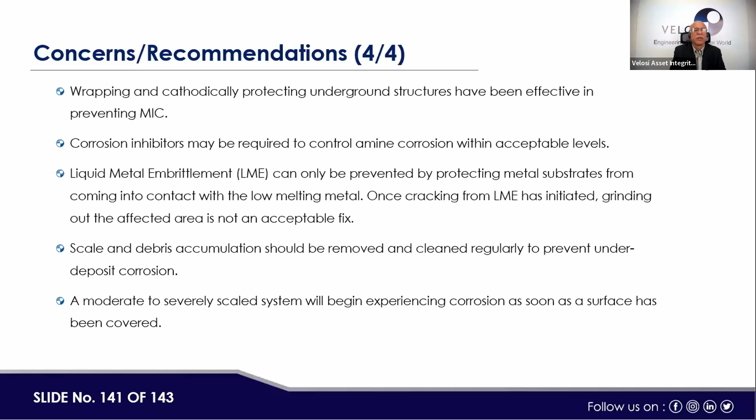So the applicable practices used for this case are also the same: API 570, 571, 574, API RP 580, API RP 581, ASME B31.3 process piping, and the UK Energy Institute guideline for design, installation, and management of small bore tubing assemblies. So this concludes our presentation.